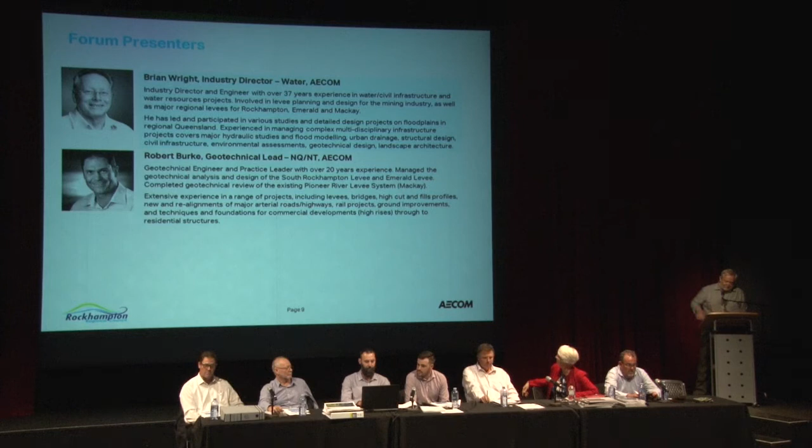The other members of Ben's team are Brian Wright, the Industry Director for Water for AECOM. I've met Brian in lots of places, and he's got the most seniority from the AECOM team, about 37 years experience in water and civil, so extensive experience there. He has led and participated in various studies, particularly in urban areas, design projects on floodplains, right throughout regional Queensland. It's nice to have you here, Brian.

And Robert Burke, he's a geotechnical guy, and he's their lead for Northern Territory and North Queensland for AECOM. Geotech guys are really important when it comes to tying these things into the ground and how the system itself operates if you have a levee. He's certainly AECOM's practice leader, 20 years experience, and he's managed many geotechnical analytics and design for lots of levees around, including the South Rockhampton levee and also the Emerald levee as well.

So that's our panel. They'll be there for your questions as well when question time comes. But firstly, I'd just like to ask Peter to take the microphone and lead us through the project history. Please welcome Peter.

Good afternoon, ladies and gentlemen. It's a privilege to have the opportunity to run through such a comprehensive project and make sure everyone can understand where we're up to and what we think we can achieve by implementing this project. The first part of my presentation is about the history of developing an understanding of the Fitzroy River. It's obviously a massive river, very complex, and it's been studied over many years. I'll also talk about what has been done over the years to reduce flood risks in that catchment and in Rockhampton specifically. The last part is about how we go forward managing flood risks in Rockhampton.

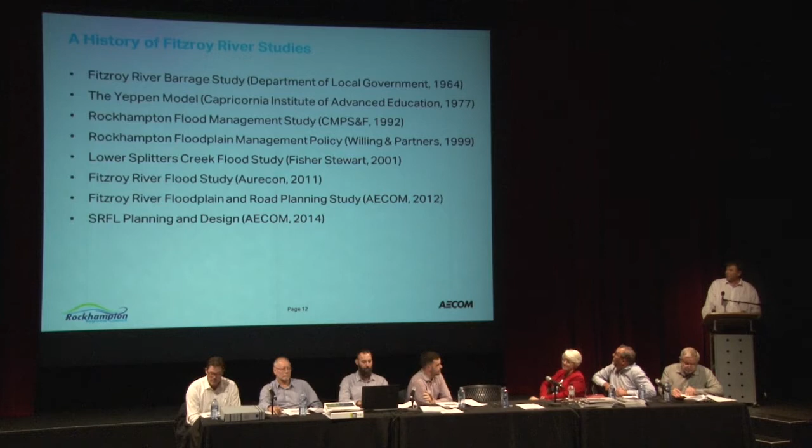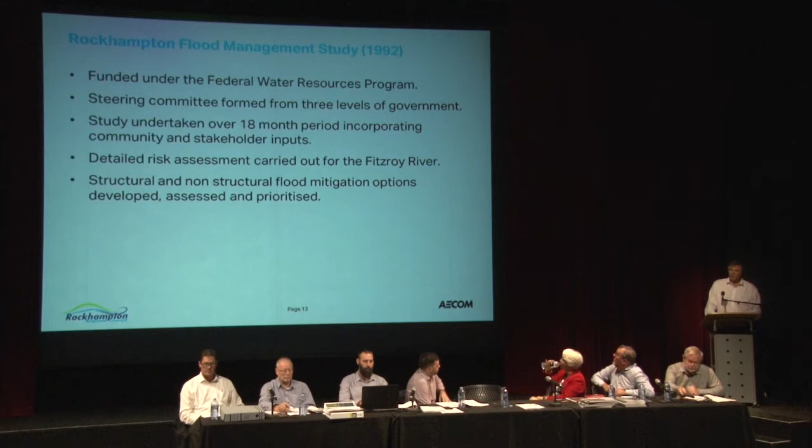In 1992, there was a major flood event in 1991 that prompted this study. It was done by the Water Resources Commission of Queensland, funded by the federal government, and undertaken over 18 months, one of the most major studies ever done on the catchment. It detailed and reviewed all the options to mitigate risk for Rockhampton, including things called structural and non-structural measures, which I'll talk about a little later. It was the most detailed risk assessment that had occurred to date.

What that study identified were some key things. It had two priority areas. The first highest priority was the Yeppen Crossing. The second was the South Rocky Flood Levee. The third was the Airport Levee, and then the Splitters Creek Levee and North Rockhampton. The 1992 study looked at various dams, weirs, diverting floodways, dredging the river, a buyback scheme for affected properties, and also raising the Pink Lily breakout.

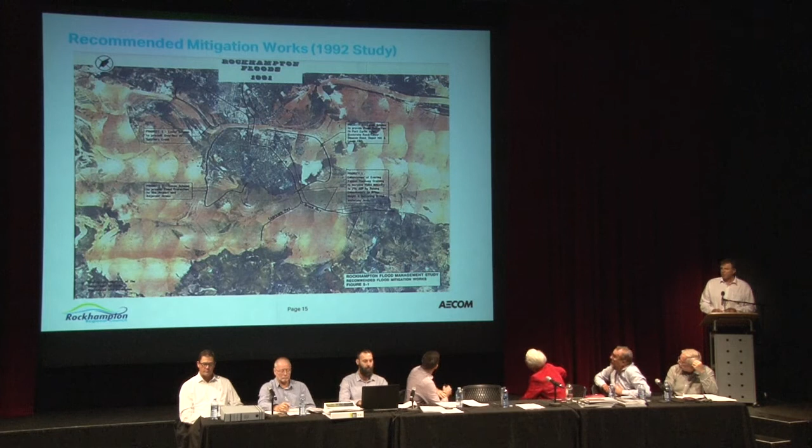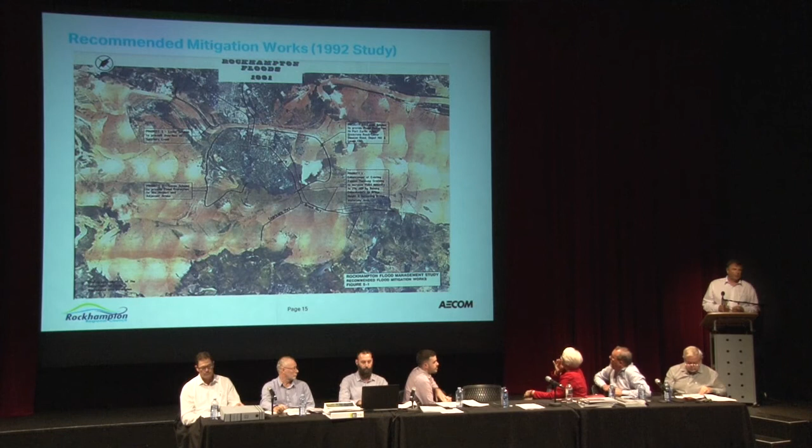So that was 1992, and as you saw on those earlier slides, there have been many other studies since. It got to a point where the council decided to develop its own floodplain management strategy, and that's what this document on the screen is. The strategy, when adopted, set the same priorities: it was still Yeppen Crossing, North Rockhampton was jumped up - and I'll explain why - and the South Rockhampton levee was still at the top. This shows the phases very clearly. We were fortunate enough to have the Yeppen Crossing completed.

There was an opportunity for funding that brought forward the North Rockhampton flood mitigation scheme. As we've said previously, the South Rockhampton flood levee has been fully designed. There was some initial high-level feasibility work done on the airport, Splitters Creek, and there are other ongoing projects across the city that we are studying right now.

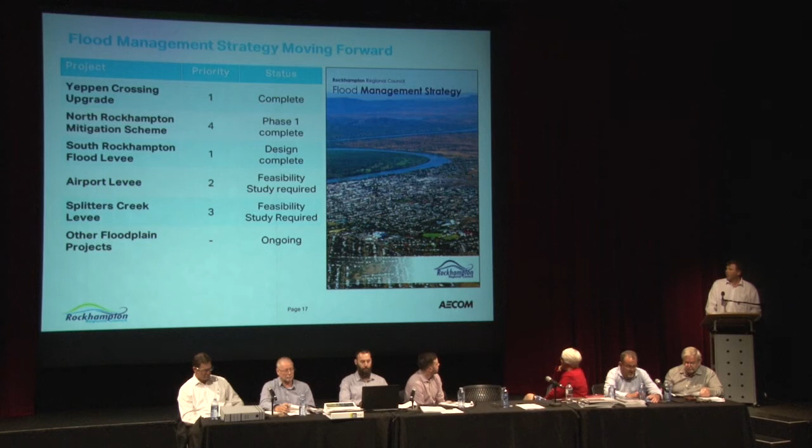Flooding's about not solving it, it's about managing the risk. Right around Australia, communities are built on floodplains, typically beside rivers, because it was a very logical and practical thing to do for a whole range of reasons.

Part of flood mitigation is about minimising and reducing risks. And there's 3 risks that we deal with in flood mitigation. I'll jump to the bottom one. Residual risk is something Rockhampton does very well. That's the risk that you can never remove. It is just not feasible. And the only way to manage that is through disaster management and having a community aware of its flood risk.

and being prepared. The future risk, Rockhampton's done a lot of work in this area. It's about flood policy, it's about planning rules, it's about making sure you don't put any more people within the floodplain and at risk.

The last component is existing risk, and really this is what the South Rockhampton flood levee is about. It's about the existing buildings and the development that's in the floodplain at risk, and the only way to solve it is through a structural measure.

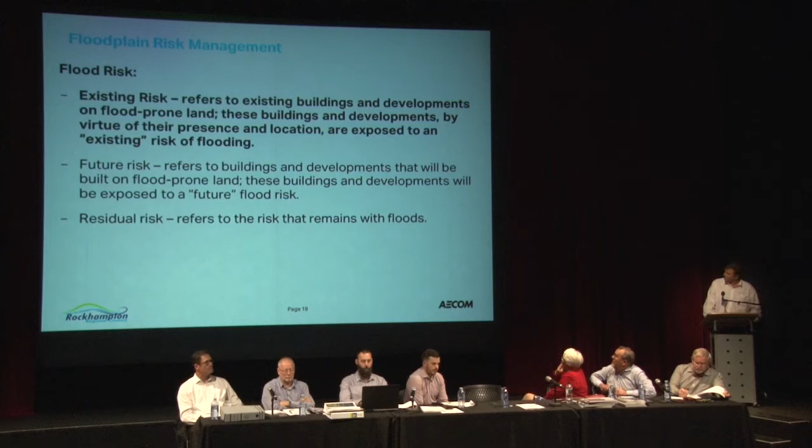And this is just another way of looking at it. So land use planning and flood policy keeps people away from the water. Structural, which is like the levee, is keeping water away from the people. Those other areas which I talked about before, which is development and planning, which is reducing risks for people who live in homes. It's about setting floor levels and giving freeboard. It's about keeping them away from those high velocity areas. And the last, as I said, is about disaster management.

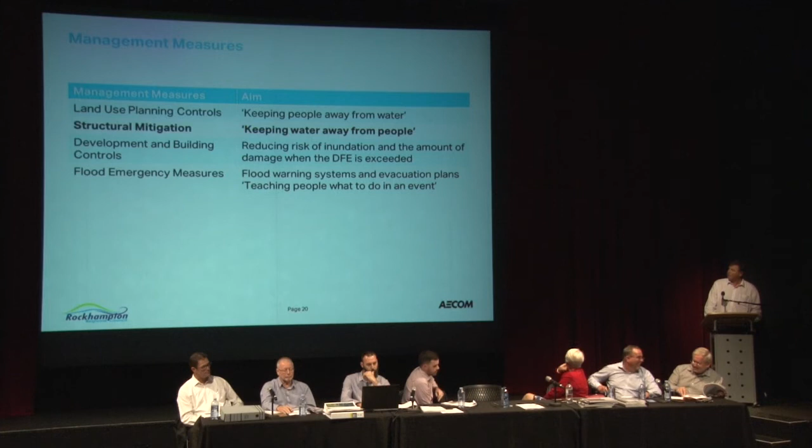Okay. So where are we at the moment?

Council made a commitment in 2013 to investigate the levees. It set money aside in its budget. It sought funding from federal and state government and was successful in achieving that. 1.45 million has been spent on the feasibility and design of the South Rockhampton levee. 416,000 has been provided by each state and federal. The study was completed in 21 months.

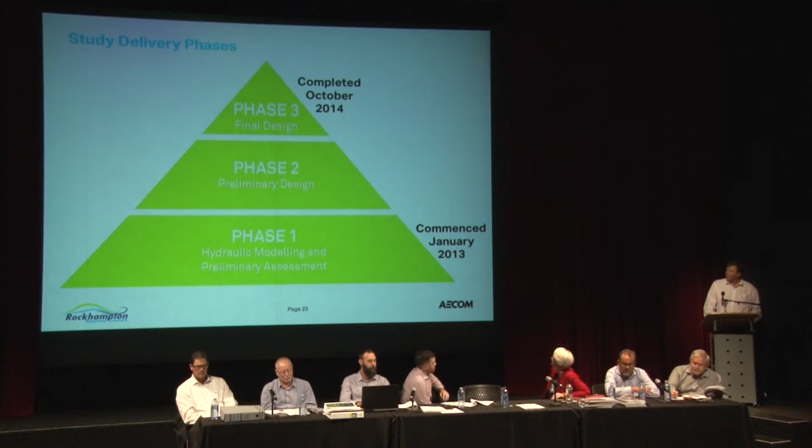And here shows the phases. So the initial phase is about modelling, and it's effectively understanding the flows, the depths, and how the floodplain behaves. It looks at the options, and you'll see some more of that in the presentation. Phase 2 was preliminary design, and in October 2014, the final design was prepared. That included detailed drawings of the proposal, the alignment, and also had prepared estimates and had done a review of environmental considerations.

So these are just a snapshot of the investigations that were undertaken as part of that project. Right at the top you'll see drainage and hydraulics, the most fundamental. That's what we need to understand before we can move forward. Then we talk about environmental heritage, geotechnical analysis, civil design, visual amenity, the impact on services, transport, and ultimately then a cost estimate and economic evaluation.

Back then, the project objectives were to develop a levee system which will protect low-lying areas of Rockhampton occupied by homes, businesses, schools, parks and infrastructure from major flood events. Not all events, but major flood events to a certain level.

Improve the flood immunity of the Bruce Highway, the Lower Dawson, Gladstone Road, which back then was still also looking for that construction of the Yeppen Crossing.

The other objective was to minimise adverse impacts of the levee, visual, amenity, hydraulics, environmental impacts on our existing infrastructure and minimise resumptions for that corridor.

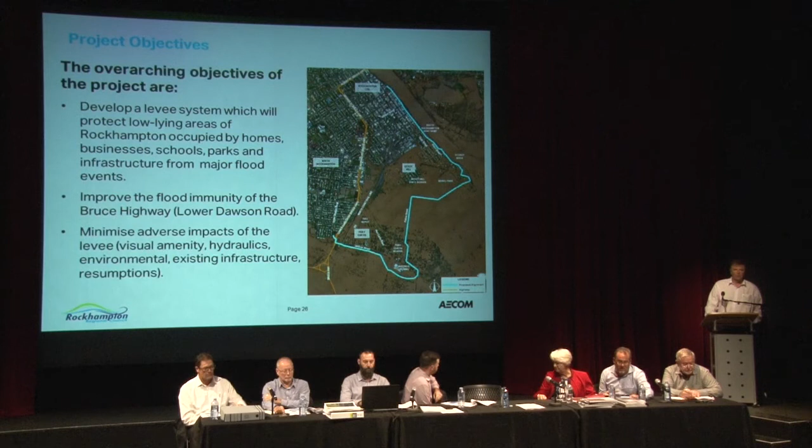I'm now going to hand over to Ben, who's going to run through the technical presentation that's been undertaken by AECOM. Thank you.

Thanks, Peter. Well, firstly, I'd like to thank everyone for coming along tonight. It's not very often we get a big crowd like this in front of engineers to explain what we've been doing for the last few years, but really appreciate everyone's time to come along and listen to us. We've already had the introductions, but I'm joined by Brian and Rob, so we'll both do a bit of handing over just to cover the technical aspects of the project.

So I might just start with our role. A lot of people ask who AECOM are. We've operated an office here in Rockhampton for about 17 years. We have 30 local staff, but we're a much bigger beast than that globally. You can see the graphic there - we're in a lot of countries, we have a lot of staff, and we do this kind of work fairly regularly with flood mitigation projects.

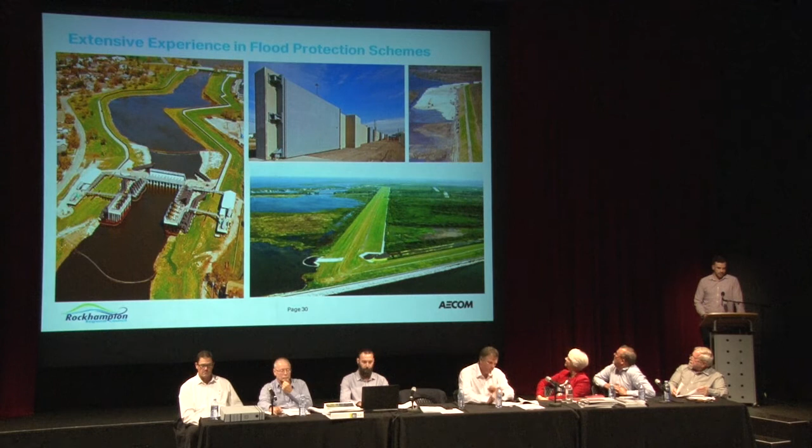So that's just a few examples. This is some work we've been doing, international projects, but also some locally as well. The one on the left is actually a major flood pumping station and floodgate. There's a big swing gate up in the top there, and then we've got some earth levees as well, so it just gives a snapshot.

In terms of our role, we were engaged by council, and ultimately we were there to assess the technical feasibility of the South Rocky Flood Levee project. Our role is to provide independent advice and technical analysis. We're not here to say whether the levee should proceed or not. We're here to give all the information for ultimately you to make that decision.

There's a lot of guidelines and technical standards that surround levees. Levees are major infrastructure projects, and so we have to align to those as engineers. We've also obtained inputs from a range of stakeholders throughout the design process, and overall there's 3 of us here, but we're going to be talking for about 100 technical specialists from AECOM who have been involved on this project, both in Australia and the US.

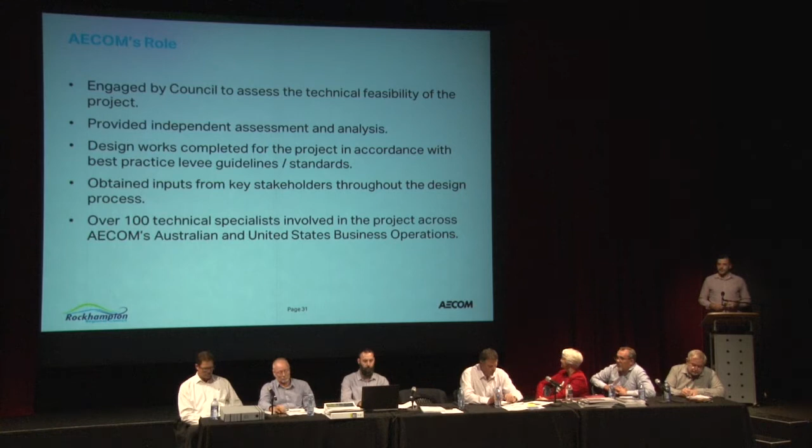I'll just quickly step through a few key definitions, because we will talk about this throughout tonight and probably in the Q&A as well. Levee - I've got a little definition there, but I will have a slide shortly just to explain that. Most people, I'm pretty sure, are aware of what a levee is.

We will talk about average annual damage, and that's the long-term annual cost to the community and the economy due to flood damage. When we do economic evaluations of levees, that's something we look at - what was the damage before annually and what is it afterwards, so we can see how that levee performs.

Afflux is another key term that's used fairly regularly. Some will be aware of that, but afflux is basically where we put an obstruction in a flow path. We have an increase in water level upstream of that obstruction, normally a decrease in flood levels downstream. So when we're talking about afflux, that's what we're referring to.

Benefit cost ratio is another one which will also be discussed tonight. Basically that's a ratio between economic benefits of a project and costs. So when the BCR is above 1, that's normally an indication that it's worth considering for funding and implementation.

Lastly, and probably the key one which I'll cover, is annual exceedance probability. When we come to do risk assessments and flood studies of major river systems, as engineers we always talk about annual exceedance probability. That's the chance that you would have a flood equal to or greater than that in a given year. Some people would have heard the Q100 or the 100-year ARI flood.

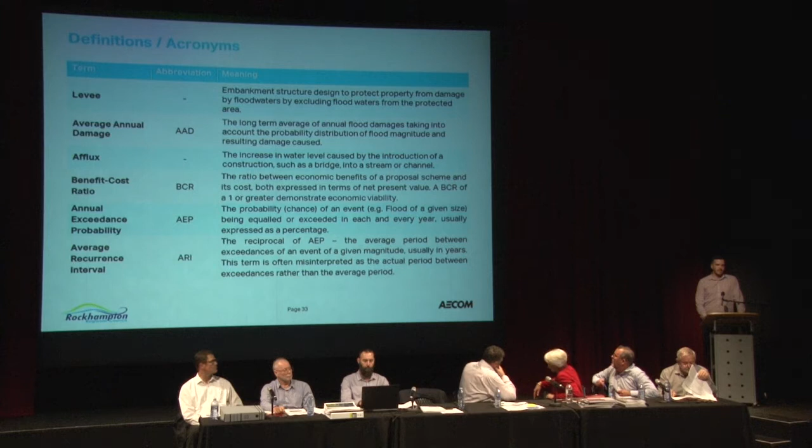That's used fairly regularly, but we won't be saying that tonight. It's a terminology that can be misunderstood by the community, and some people think if you've had a 1 in 100-year flood, you won't have that for another 100 years. That's just not the case. Statistically, what we'd prefer to say is you've got a 1% chance of that happening each year.

Emerald's a good example. Emerald had a major flood in 2008, which was a 1 in 70 year flood, and then 2 years later had a 1 in 130 year flood. So they've had 2 major floods within 2 years of each other. Statistically, that's just how it goes.

In terms of levees as a flood mitigation option, as Peter mentioned, there's a range of different options, and levees aren't always the answer. Levees are used in particular circumstances where it warrants them. But if a levee is a potential option, what we're normally looking at is raised predominantly earth embankments. However, there are other types of levees which I'll go through as well.

In terms of how they get used around the world, there's about 48,000 kilometres in the US that the US Army Corps knows about. They expect there's another 150,000 kilometres that they don't have documented, across almost 12,000 different systems. So the statistics are pretty mind-boggling. You've got 2/3 of the US population behind a levee over there, so it's frequently used. There's several 100,000 kilometres when you sum that up with the US and Europe, and even in Australia we've got several thousand kilometres used. So they are used around the place.

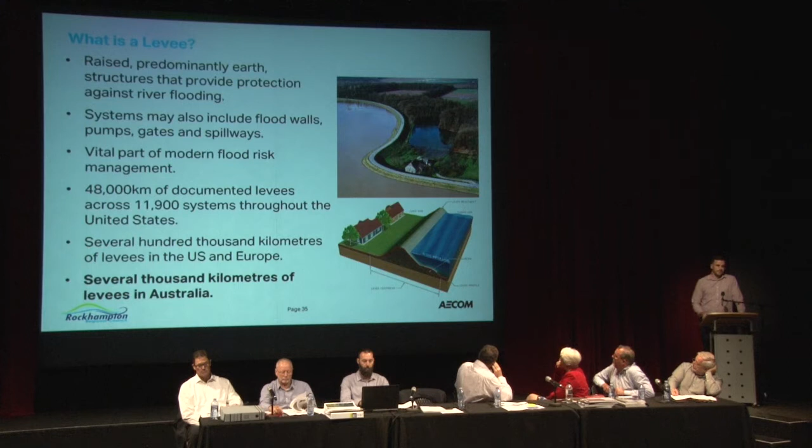So just some examples. I thought it's worthwhile doing a quick snapshot. These aren't all the levees, but these are some key ones.

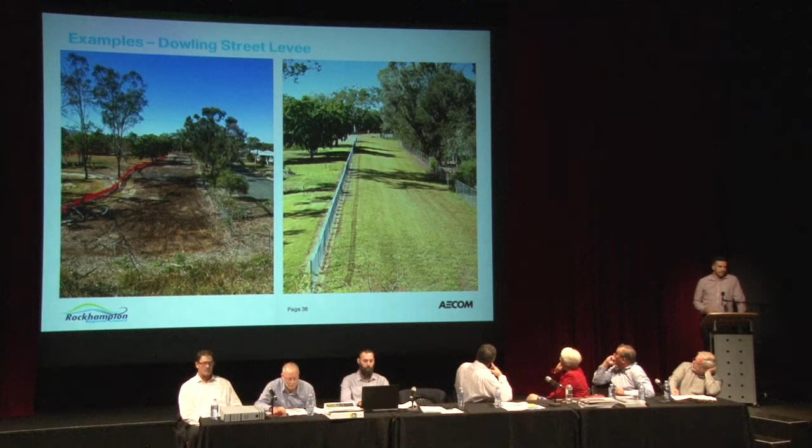This is in Rocky, in our backyard. This is the Dowling Street Levee, Kershaw Gardens, for those familiar with that area. It's an 800 metre long crib wall system, put in place in 2016, protecting about 20 homes. You can see on the left, before construction, on the right, after construction. And this was it during the flood we've just had - it's a bit hard to see, but that's the levee running around here.

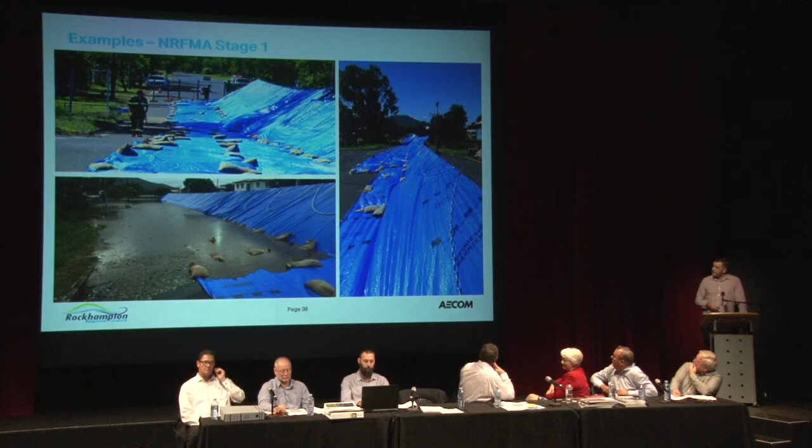For those not aware, Lakes Creek Road is actually a high point all the way along, and that system in itself performed as a levee. So the road and rail there are higher than the flood height, all the way up to a 1% annual exceedance probability - quite a high level of flood protection offered by Lakes Creek Road.

So there's about 400 properties protected with this stage 1 of the scheme. Stage 2 is to ultimately move that barrier further down and protect more properties, down to Water Street. But Water Street requires reconstruction in order to achieve that, so that's a future stage of the scheme.

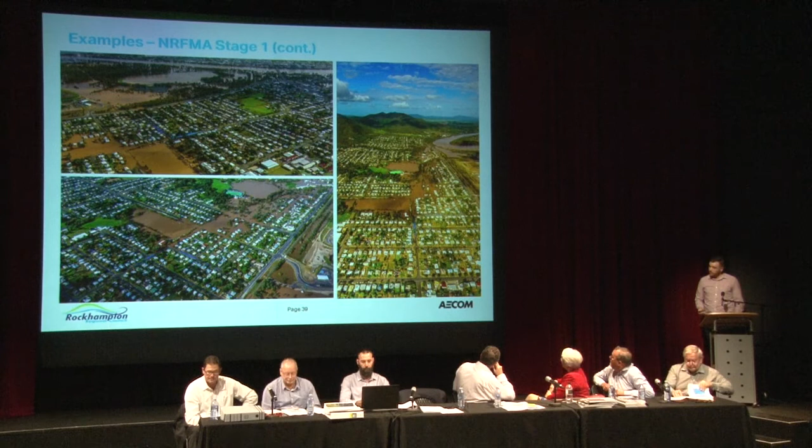And all the neighbours up in Mackay - Mackay's had a flood levee system since the 1970s on the Pioneer River. It's a mixed type system, with earth levees, vertical flood walls, and crib walls, very similar actually to the South Rocky flood levee proposed here. Longer than ours, 13 kilometres, across 7 different levee systems on both sides of the Pioneer River. That system's been in since the 1970s and has protected Mackay on numerous occasions - 2008, 2010, and even in some of the recent flooding we've had this year.

Charleville, most people are probably aware of this one as well. Completed in 2009, upgraded slightly in 2013, it's protected against 3 flood events since construction. Again, it's a combination - earth levee components, gate crossings across the road like we'll have here, some temporary barrier as well, and some vertical walls. That's another example of a flood levee system used in rural Queensland, costing $20 million.

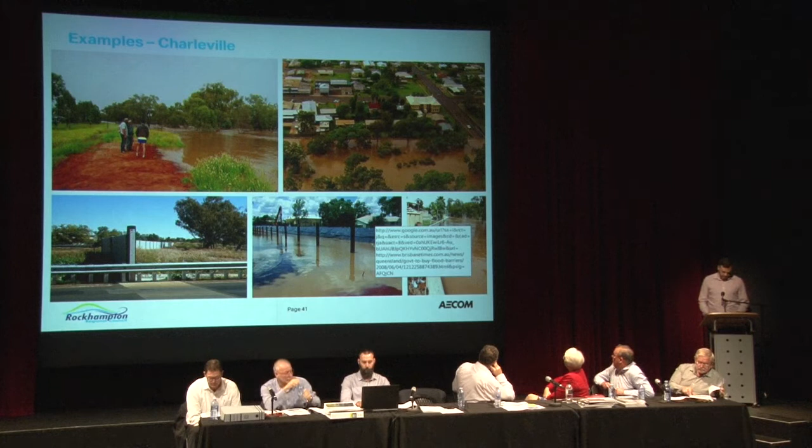And after that one, Suncorp have done some assessments - average insurance premiums went from $990 a year down to $400 after the levee was completed. And it's actually paid for itself already, after about 8 years.

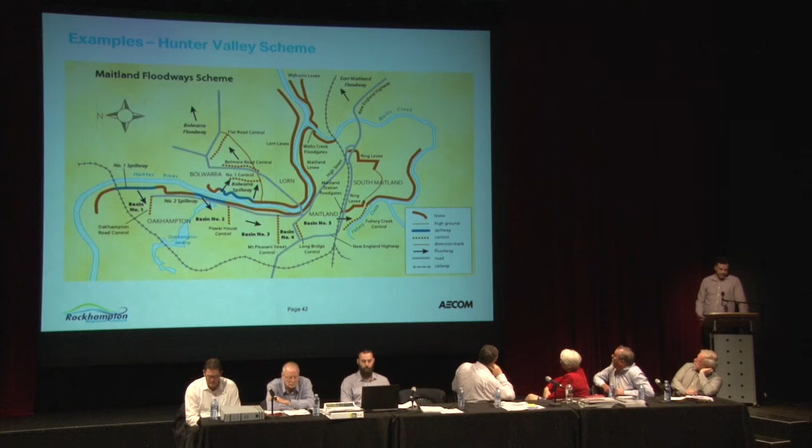So you can go to the Hunter Valley. The Hunter Valley scheme is enormous, with 160 kilometres of flood levee, 5 basins, and 3 spillway overflow points. The flooding that occurred in 1955 really spurred the council, the state government, and the feds to implement this scheme. It's mind-boggling, 160 kilometres of levee, and it's protected a number of townships there in 1971, 1977, and 2007. So it's been there for a long time.

Launceston, down in Tasmania, is another good example of a scheme that was completed earlier, quite some time ago, and was starting to become structurally deficient due to old standards and codes and ongoing issues with not maintaining some components. So they've got in there and actually reconstructed the scheme. It's a 12-kilometre levee system completed in 2015, only recently, a $60 million project which protected during the 2016 event, which was quite a significant flood event down there.

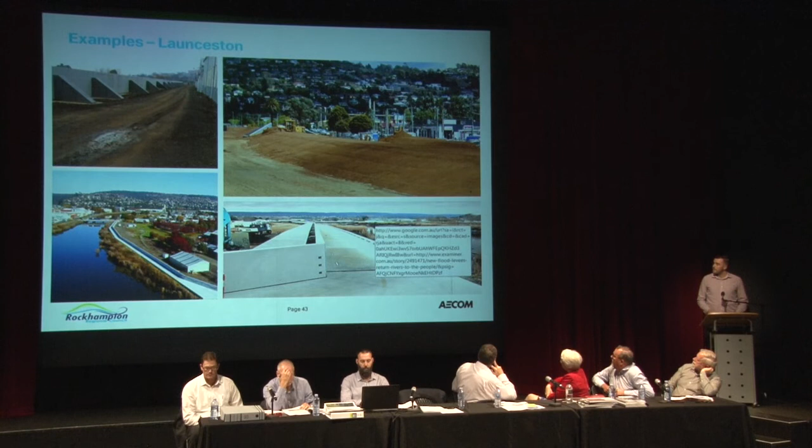I'll get in front of everyone who's going to ask about Lismore. We'll put the record straight, because the media did a pretty poor job, to be honest, explaining what happened in Lismore. The Lismore flood levee system was completed in 2005, and it protected the CBD of Lismore in 2005, 2007, and 2009. The cost of those 3 events alone has already paid for the levee system, plus almost again. It's a 3 kilometre long levee system, and it cost $20 million.

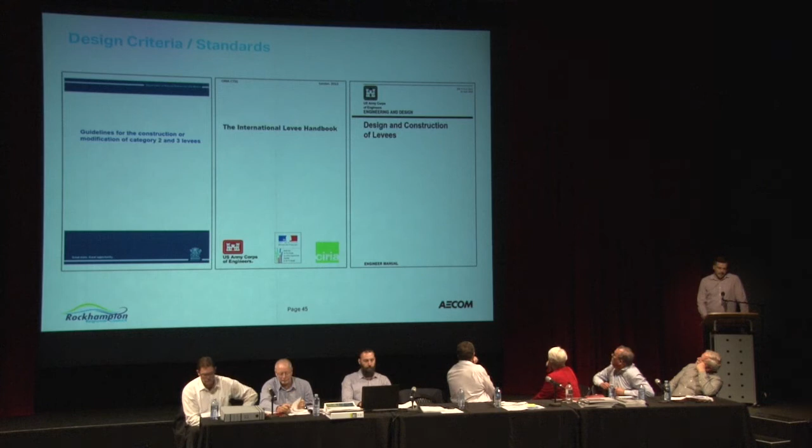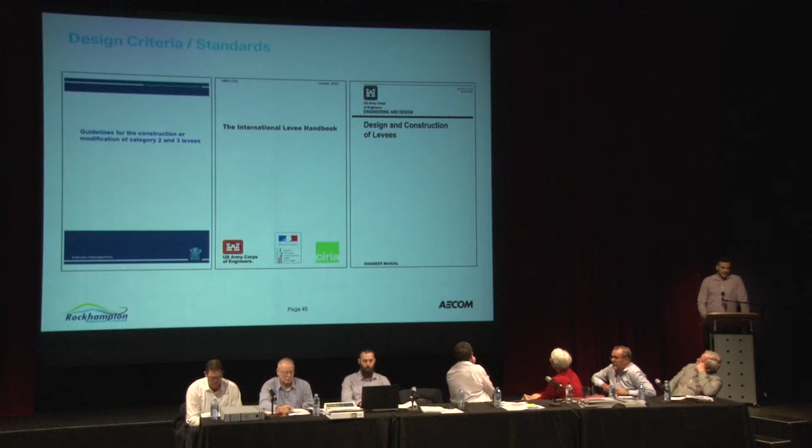In terms of design criteria and standards, there's a number of relevant design guidelines and standards. The one on the far left is really good news for the engineering industry - the Queensland State Government is now regulating levee banks and has been for a couple of years now. It was much needed to make sure levees are designed to the right codes and requirements. There's now a requirement for a council, as in this case, to make application under the new levee regulations, with specific guidelines and requirements levees must meet to achieve approval.

The Queensland Levee Guidelines make significant reference to the International Levee Handbook. That's been the work over 5 or 6 years from the international levee community across multiple governments to pull together international best practice when it comes to levees into one big guideline. That's the particular guideline that's been adopted for the South Rocky Flood Levee planning and design.

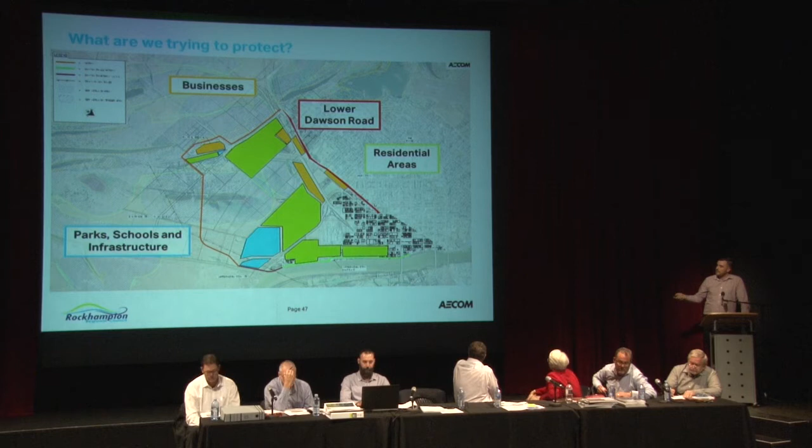This was the original alignment put forward in 1992, which Peter showed a bit of a map out of the study back then, and that's where we started with the study. First, as we worked through this, there's a number of things that probably pop up for most people - it did encompass the key infrastructure, the residential area, and commercial buildings.

This is a key flow path, and I'll go through this a bit more, but this is the roundabout, and this is going out through the Yeppen crossing and coming into town. The flow through this throat here, through Yeppen North as we call it, is significant, and it's a very important flow path for the western floodplain.

The implications of the levee here cause the majority of the effects back upstream through the western floodplain and back to the airport. So the choice of alignment needs to be made very carefully. That was a key issue with the old '92 alignment, it jutted out a bit, and that wasn't going to be good from a hydraulics perspective.

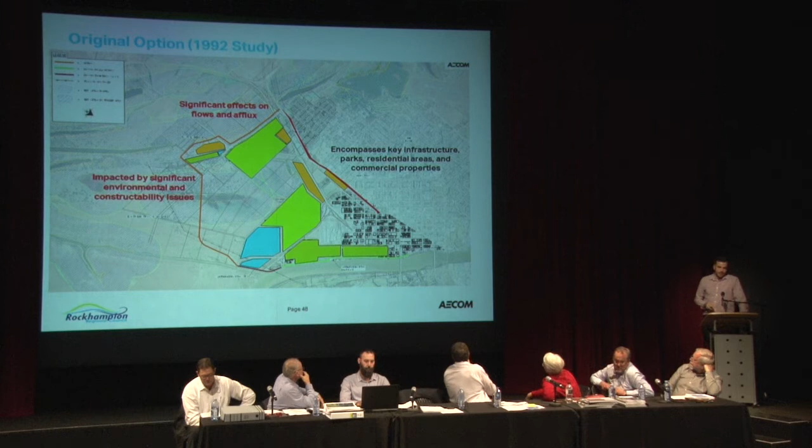At the time it was probably unknown, but now we know it crossed right through the middle of a wetland, and not just any wetland - one of national significance. It's a key wetland for the region, and it also has significant cultural heritage value to the Darumbal people. That was a key issue with the original 1992 alignment crossing through there.

We also had some interference with some fairly major overhead transmission lines coming into Rockhampton that Powerlink own.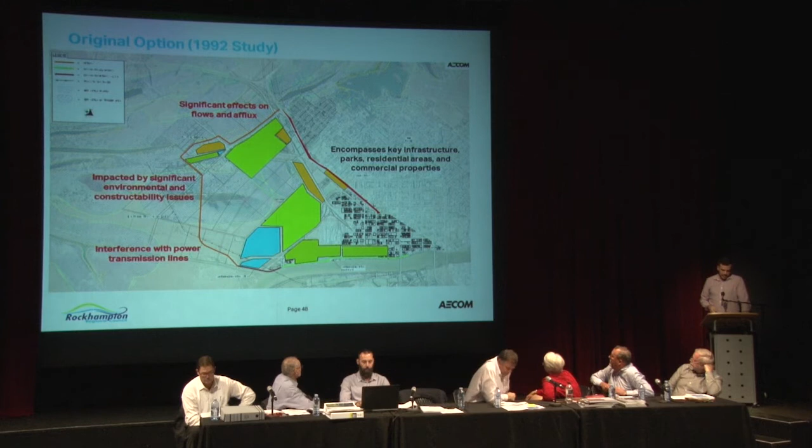So the study commenced with us looking at alignment options, and we generated a number of options which you can see there, with different pros and cons as always with this kind of infrastructure, some people being left out, some left in, and obviously different costs associated with those different levee alignments.

The process then becomes a fairly rigorous one over about 5 or 6 months. We looked at a number of different disciplines across our technical teams to determine the pros and cons of each alignment, then ran through a process of scoring and workshopping.

We had a number of workshops with key stakeholders, including state government input through a number of those, basically trying to arrive at the best balance with the selected levee alignment. It's always a balancing act with any of this kind of infrastructure.

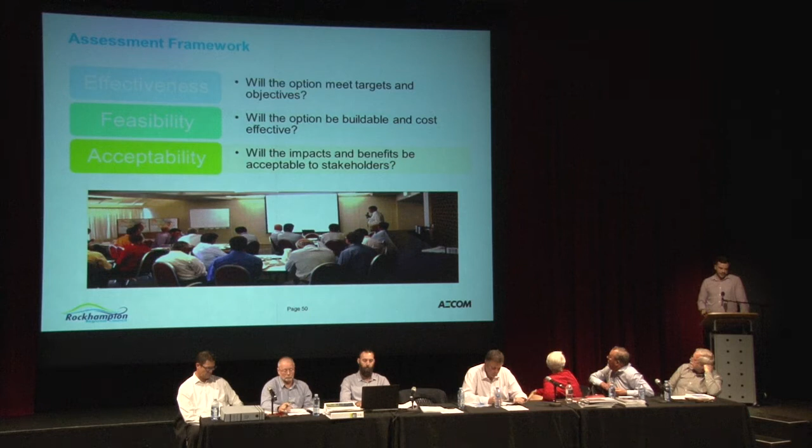We've moved well away from that wetland and onto the Fiddes Street area. Similarly, we've pushed right over to Rosehill Park and got around the back of the treatment plant before coming down the main strip down Quay Street.

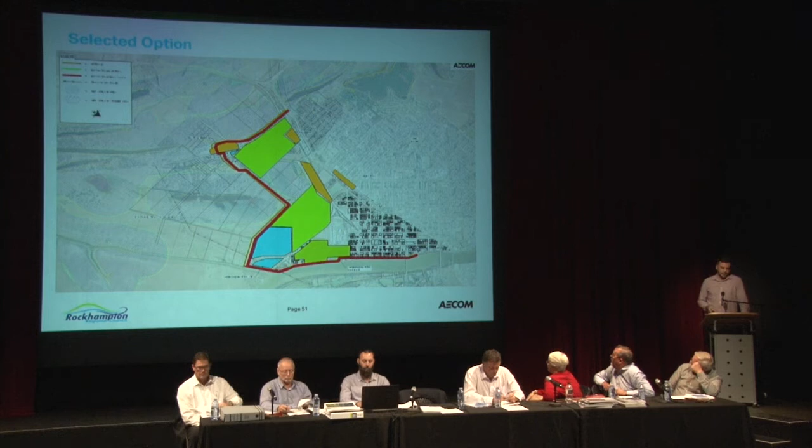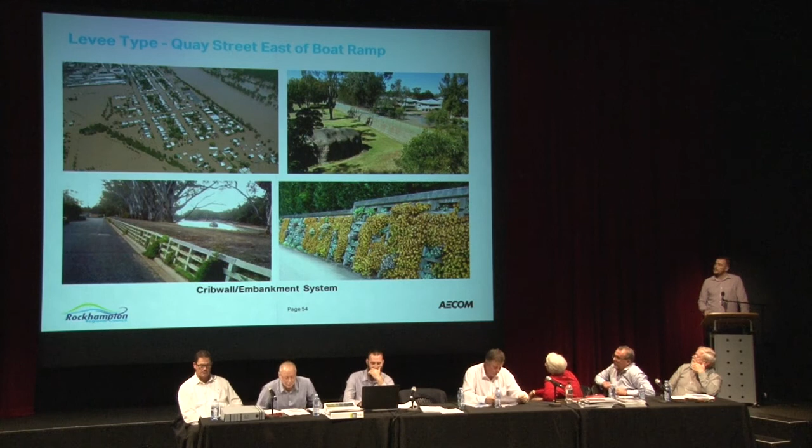When we get into the rural areas where we've got more space, we adopt the earth levee. It's fairly stock standard - we'll talk more detail around the specifics and material properties, but we go with an earth levee, and in this case we're adopting a vinyl sheet pile on top. The intent of the vinyl sheet pile is purely just to provide the freeboard, which I'll touch on shortly. But for the most part it's the earth embankment, grassed, and in some locations rock protected where we need to from velocities.

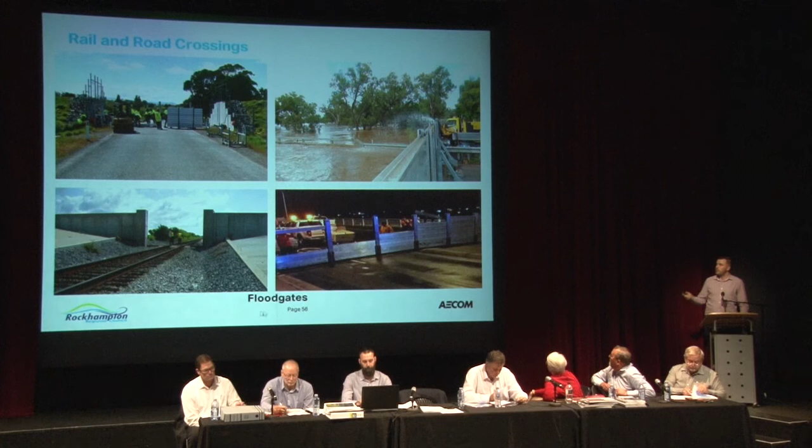We have a number of gates where we're crossing existing roads, and we also cross the North Coast rail line, which requires a gate structure. Gates across roads and rails are done all the time in levee systems, nothing new. You can see examples from Australia, Europe and the US—they're done fairly frequently. It's about bringing the levee to terminate on either side of the road or rail, then putting demountable barrier in before the flood event arrives to close that opening. In normal situations, the levee terminates on either side of the road and rail and continues onwards.

The obvious intent of the pump station is to collect stormwater. If we have a river flood occurring at the same time, we're collecting stormwater from local runoff and rainfall and pumping that over the levee. It's a frequently used bit of infrastructure for most levees.

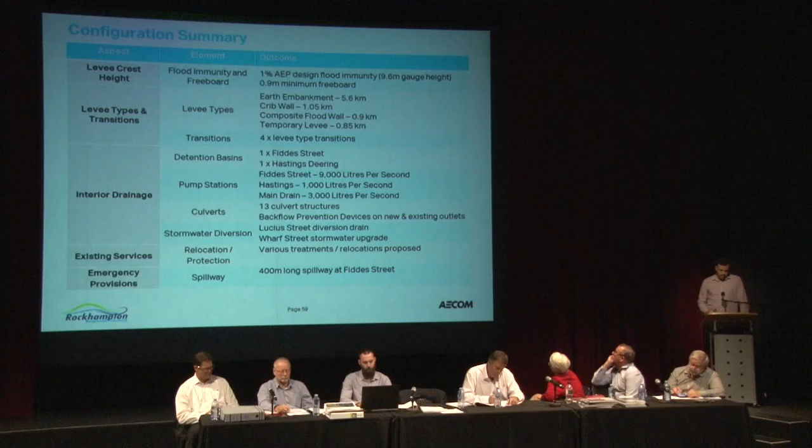That incorporates a 0.9 metre freeboard, which is quite significant, probably one of the largest that any Queensland levee has got on it at the moment, and we'll explain why.

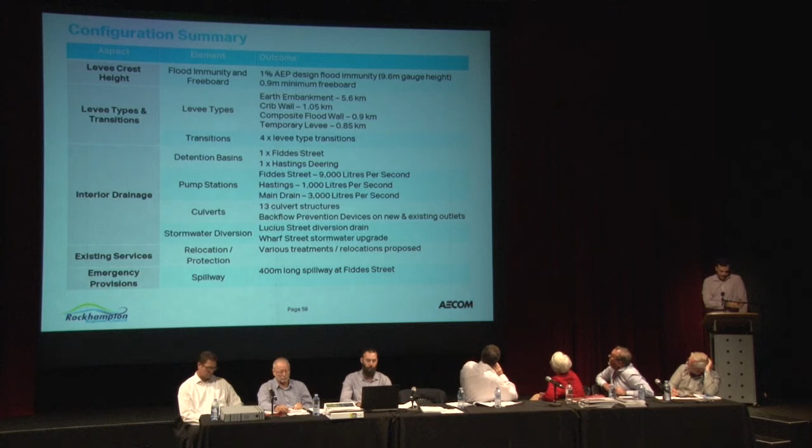Working through, we then have a number of levee types, so you can see the breakdown of the levee types we just discussed. Ultimately, earth levee is used predominantly, 5.6 kilometres. It's the cheapest, it's the most effective, and we use that wherever we can. We do have transitions between levee types, and that's really important - it's a key consideration from a technical perspective about how you transition from one levee type to the other. In history, they can be weak points, so there's a lot of guidance around design of those transitions.

In terms of interior drainage management, we have 2 detention basins, one at Fiddes Street, one at Hastings, and 3 pump stations. To put that in perspective, think of a 1 litre milk container - we're talking 9,000 of those a second at Fiddes Street, 1,000 at Hastings, and then 3,000 litres a second at the main drain.

Culverts allow flow through, so where the river isn't up and we just have a local storm event, we want that runoff to get through the levee system. We have 13 culverts that allow flow through the levee in normal operation, and each of those have backflow prevention to prevent the river from backing up through those culverts.

We do have some complementary or associated works for Lucius Street and Wharf Street, both stormwater drainage upgrades to facilitate interior drainage behind the levee and get that water to the main drain to then be pumped out.

There's obviously a number of existing services, which I won't go through in detail now, but there's a number of protection and treatment requirements for those services like power, gas, and electrical.

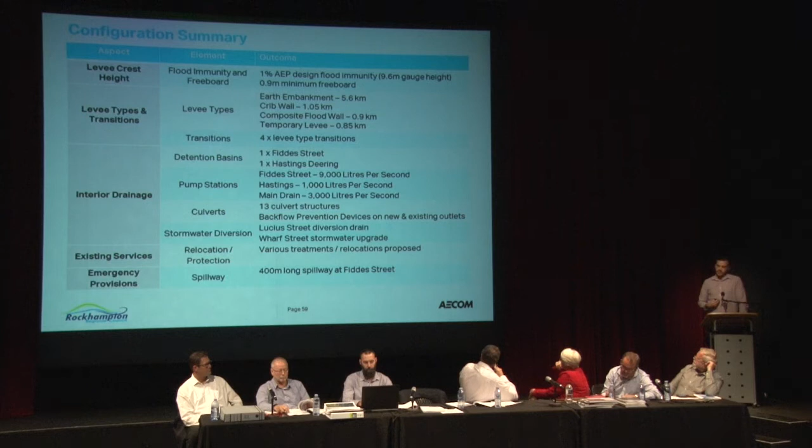And then we have our emergency spillway - it's a 400 metre long spillway at Fiddes Street. We'll talk in a bit more detail about that.

So that's me for now. I'll hand over to Rob and I'll let him cover the geotech considerations.

Good evening, everybody. I'm going to give a relatively brief overview of the geotech conditions, especially after that first start.

As you can see here, the ground conditions along the alignment are alluvial - flood-borne deposits, usually comprising sands and clays. This is borne out by the findings of the investigations undertaken. So between lower Dawson Road and Fiddes Street, what's been identified to date is a thin stratum of surface clay underlain by clayey and gravelly sands.

Generally that alignment, based on the embankment arrangements, is definitely suitable for carrying the loads of the embankment, with expected moderate seepage to occur primarily beneath the clay capping.

Whereas for Fiddes Street to Fitzroy Bridge, there's a thicker, up to 6 metre stiff clay underlain by clayey and silty sands, also suitable to accommodate the levee structure, but because of the thicker clay deposits, there's less seepage potential.

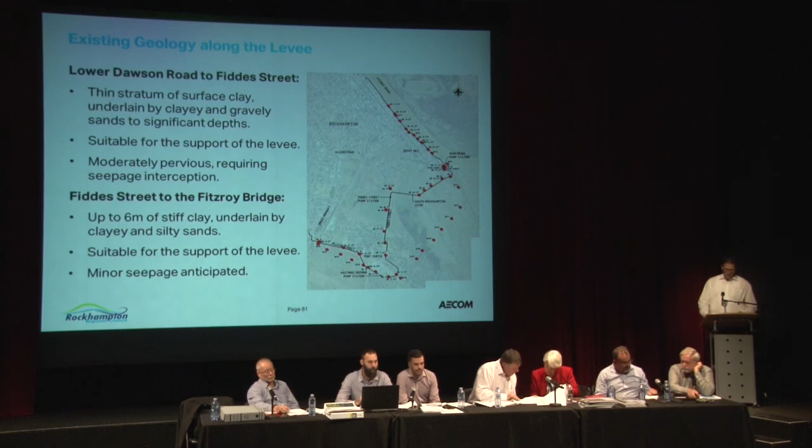I'll just flip on to what some of the ground investigations were undertaken. There are 3 ground investigations that have been undertaken.

The council were extremely proactive in undertaking the first investigation before the commencement of the design, which followed the alignment of the original, first option alignment. That was very helpful in determining additional works and investigations staged thereafter, which comprised geophysics and then borehole probes, test pits and cone penetrometer testing.

To supplement that, in situ testing to determine expected permeability - i.e. the rate groundwater seepage is going to travel through the soil - was undertaken in the field to give us a more accurate representation of the ground models.

As part of those investigations, we were asked to evaluate material sources. Embankments are built from soil, and finding a source that would meet the expected 400,000 cubic metres of soil required to build the levee was needed, so the Gracemere site was looked at after reviewing some other alternatives. The Gracemere site was found to provide suitable material for our embankments, comprising a core centre with more permeable material on the outer flanks. Some treatment would be required, but the proximity and location seemed to provide value to the project.

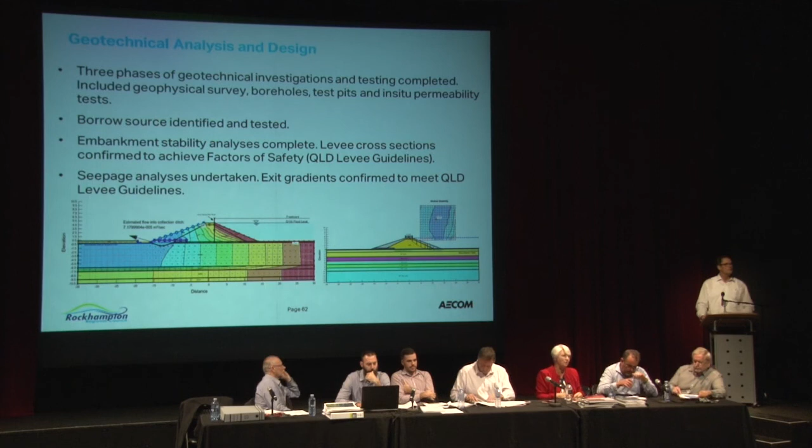So basically, after assessing the seepage potential and the flow paths, that's what goes into determining pumps, how to collect the water, and how the hydraulics is managed.

Stability is another aspect of the embankment, to ensure that during what's called a rapid drawdown state, which is usually the most critical state for a soil embankment, when it's saturated and water's up against the wet side of the levee at its maximum height, it actually provides a stabilising force. What occurs is when the flood level drops away, the embankment's fully saturated, and then it becomes more likely to be susceptible to instability.

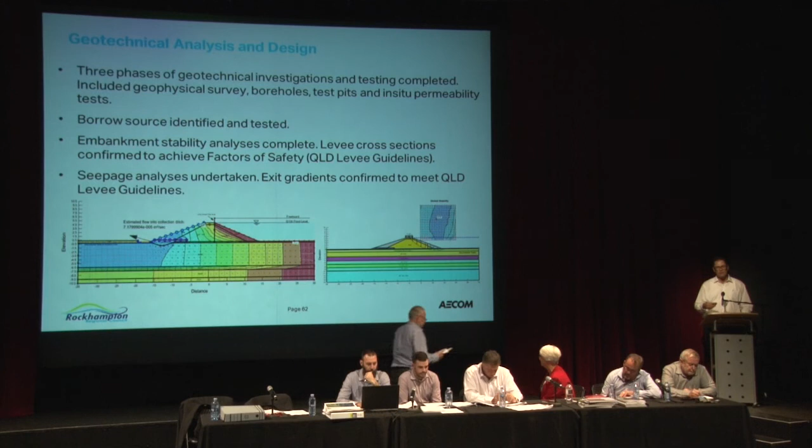The stability analysis ensures the long-term performance and behaviour of the embankment, and is also carried out to confirm compliance with specifications. All that information feeds into the other design teams that evaluate the hydraulics and the requirement for pumps. So I'll pass over to my colleague Brian to discuss the other civil structures associated with the project.

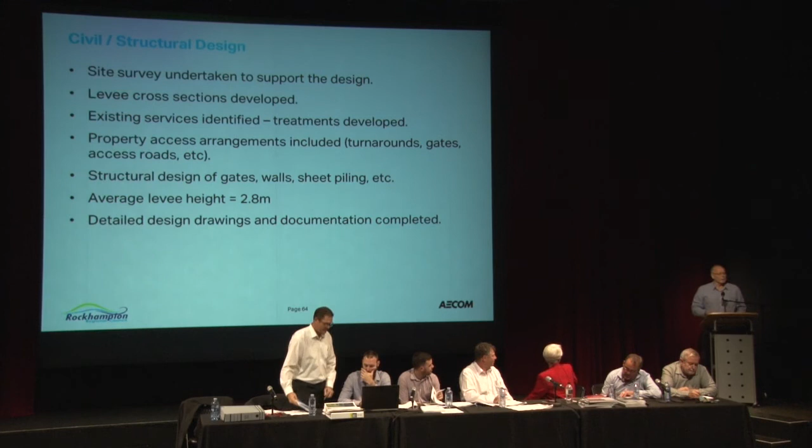In terms of the civil and structural design, as Rob mentioned, we gather a whole lot of information from the geotech side, from the hydrology and the hydraulics, and we develop the engineered components of the levee system.

There was LiDAR data originally, and then a specific site survey along the route was undertaken. We developed our type cross sections, and as Ben mentioned before, there's basically three types: an earth levee, a crib wall, and vertical levees or vertical walls.

We looked at property access arrangements, including turnaround areas, some gates, access roads, etc. We then did the structural design of the gates, which is basically either concrete or steel structural designs.

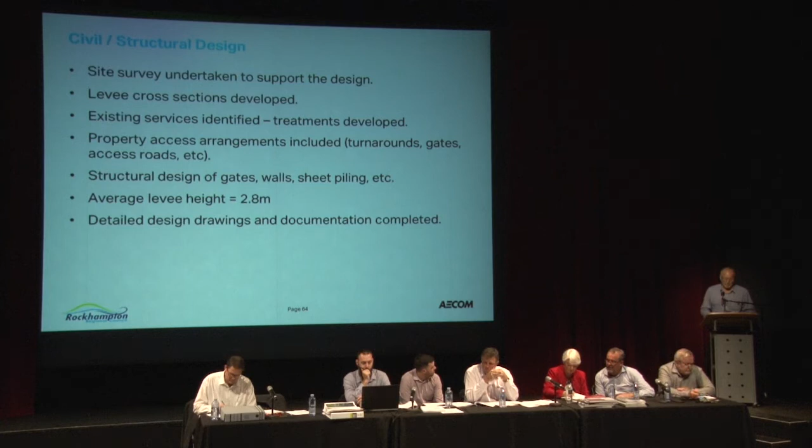Just as an indication, the average height of the levee is about 2.8 metres, but it does vary from about 0.3 up to about 5.8 metres high. At the end of all that, we ended up producing detailed design drawings and the documentation that goes with that.

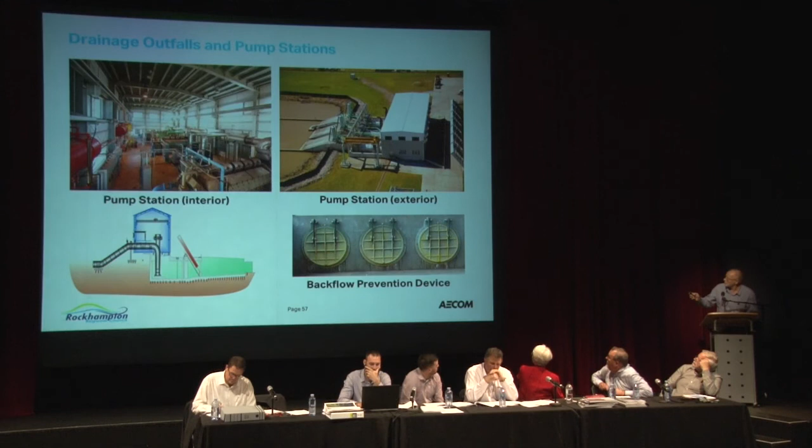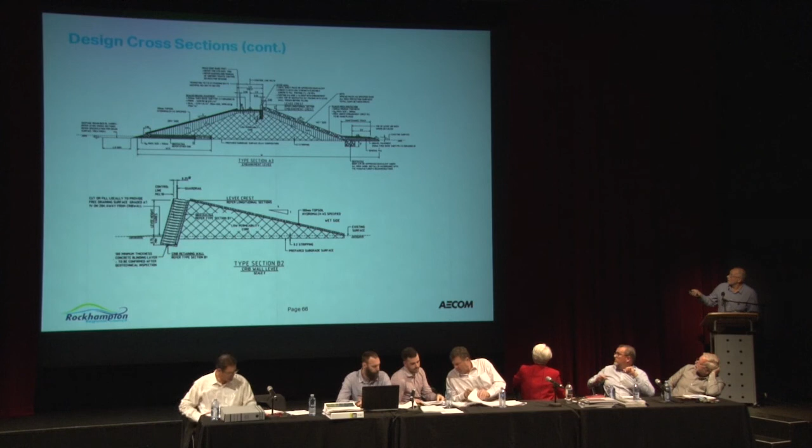In this top one there is some rock protection on some areas of the outer embankment where flood velocities are higher, which needs to protect the levee. And then this is the composite levee down here - sorry, that wasn't the composite, that was the crib wall.

I just want to mention also about visual amenity very quickly - it's a very high-level study assessment looking at greening areas. I'm getting a nod to say we've got to keep moving quickly, so there's some further work to be done in terms of that visual amenity.

And I'll hand back over to Ben quickly.

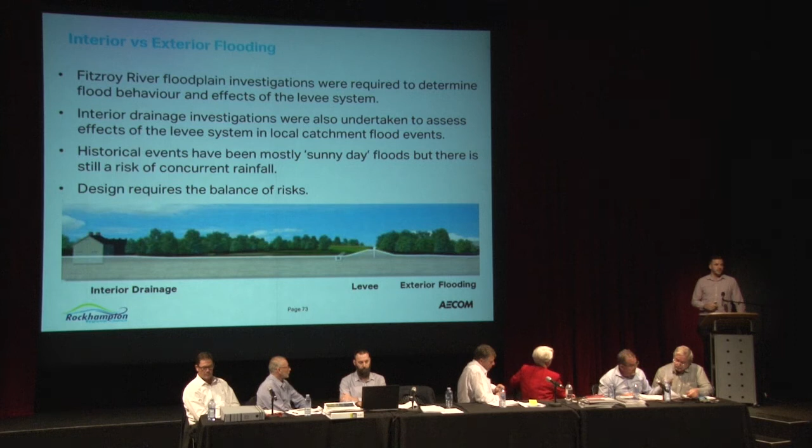Firstly, interior versus exterior flooding. There's two separate issues here with levees, and the bottom hopefully shows that. So when we have exterior flooding, we're talking the Fitzroy River. When we're talking interior, we're talking the South Rockhampton local catchment, which can flood as well behind the levee.

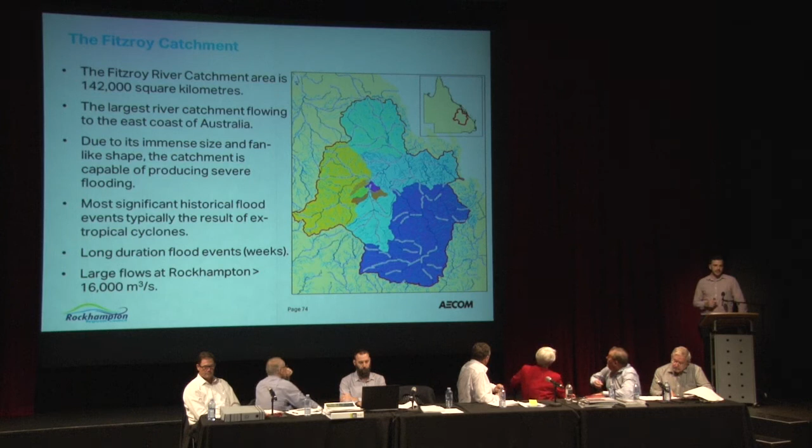I won't go through this - most are aware, Fitzroy River catchment, 142,000 square kilometres, biggest catchment to the east coast of Australia, and large flows - that's probably the only other thing. So 16,000 cumecs or greater.

In terms of the flood behaviour, when we get flows greater than about 7,500 cubic metres a second down the river, we get the western breakout that occurs, which I'm sure all of you are aware of.

So how do we look at a catchment the size of the Fitzroy? In this case, we're fairly lucky - we've got over 100 years of gauge data upstream of Rocky at Yaamba, Wattlebank and the Gap, and so we combine those records and we can look at flood peaks and volumes.

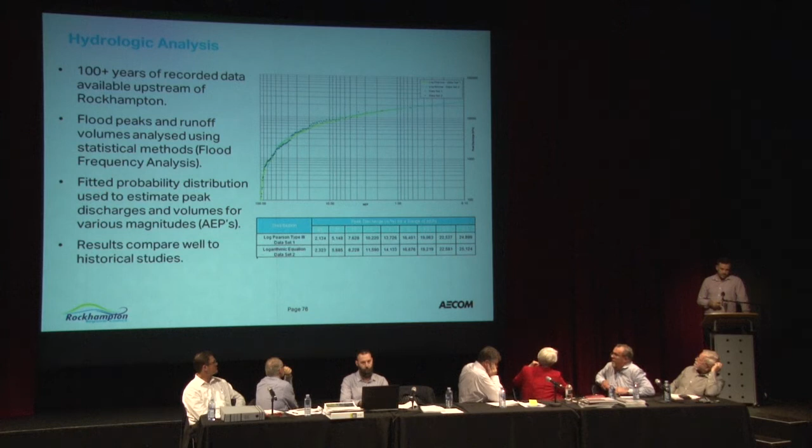Every flood's different, everyone's aware of that, but we can do statistical analysis of all those records to work out a best fit probability distribution, which you can see on the right, and that allows us to estimate flood frequency quantiles, which are flows basically for different probability events.

Then we turn to the hydraulics, so we have an indication of how much flow is coming down the river for different annual exceedance probabilities, and then the hydraulic model turns those flows into flood behaviour - what height, what extent, what level, what velocity would that water get to around the floodplain. In this case, it's a two-dimensional flow model developed for the river.

To cut off those questions before you ask - no, this model isn't used for flood forecasting. So if the flood forecasting in the last event was a little bit out, that's not this model. That's a model that BOM runs, which takes a couple of hours if that. This model here runs for about 3 to 4 days, so it's a much more detailed model that's required for the floodplain.

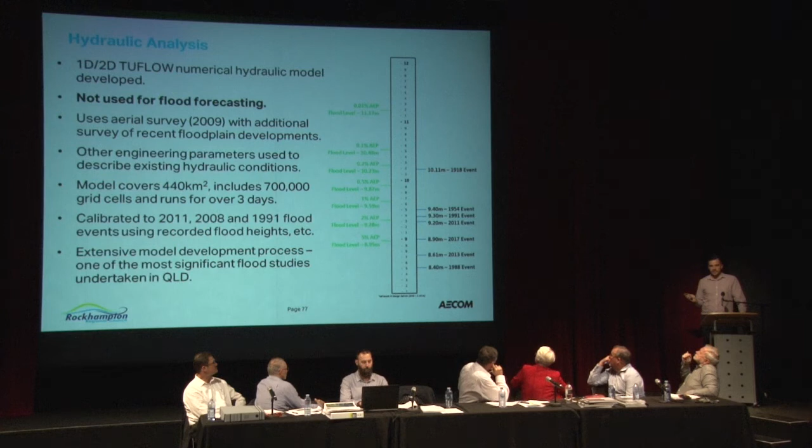The model covers 440 square kilometres of floodplain, 700,000 grid cells to assess flooding, and when we produce these models we calibrate them to actual recorded flood heights and velocities, making sure the model can replicate conditions that occur during those flood events. Out of all the studies we've been involved in, this Fitzroy River is probably the most extensively studied, so there's a number of models that show good correlation between them.

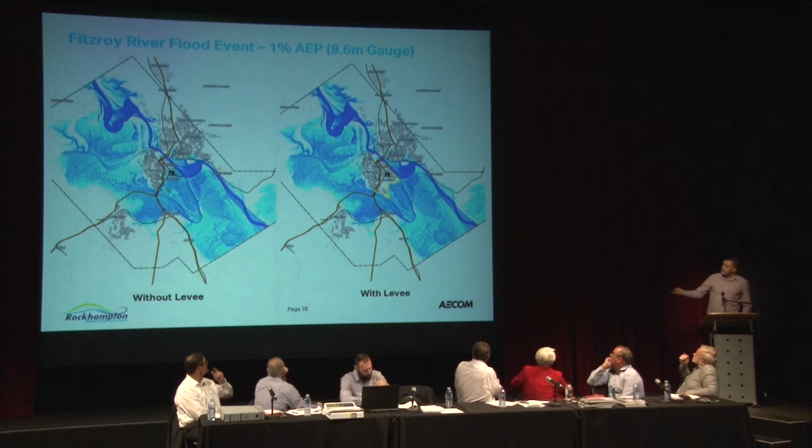There's a couple of animations here, so you're seeing side by side basically. We'll replay it if we have to, or we'll do that during the Q&A. So it's just a side-by-side simulation of a 9.6 gauge height, which is the design height of the levee. Critically, you can see the levee on the right here in yellow. I'll go back and see if I can get it to run again.

Initially, as everyone's aware, you have that backwater come back up Gavial Creek and into the western floodplain. Those coming across the floodplain probably saw dirty water here, clean water on the other side in the last flood. That occurs initially, and then the breakout occurs at the west, up at Pink Lily, and that flow then comes back through the Yeppen crossing. So flows particularly through here, as I said earlier, are critical in terms of the levee, because the levee has to take that flow around the corner there.

I'll just go one more time. The other critical flow path is obviously then down the main river channel. The levee along here, we've positioned it on the top bank, away from the bank as far as we practically can, to get it away from constricting the river. There is some slight constriction though that occurs down, particularly around the treatment plant near Gavial Creek there, and that does result in some increase in heights, particularly for this North Rocky area. That was a key reason why the North Rocky scheme, the other project, was brought forward, to try and offset the impacts that the South Rocky levee would create.

Afflux map, so predicted differences with the levee being put in place. What would occur? What happens to the flooding? So the area in green is obviously protected area, that's no longer wet. Again, you can see the key flow path being through the Yeppen North throat, and also to some lesser extent through the Yeppen South area. That area there where the levee comes out does cause increases in flood heights, which you can see there, and transitions back to the airport.

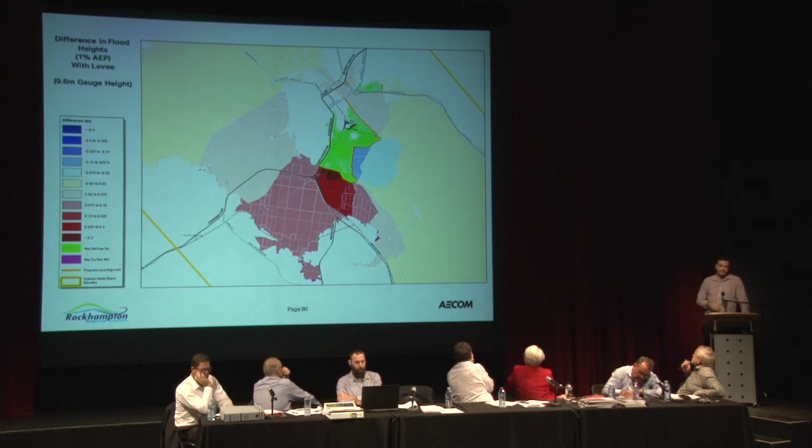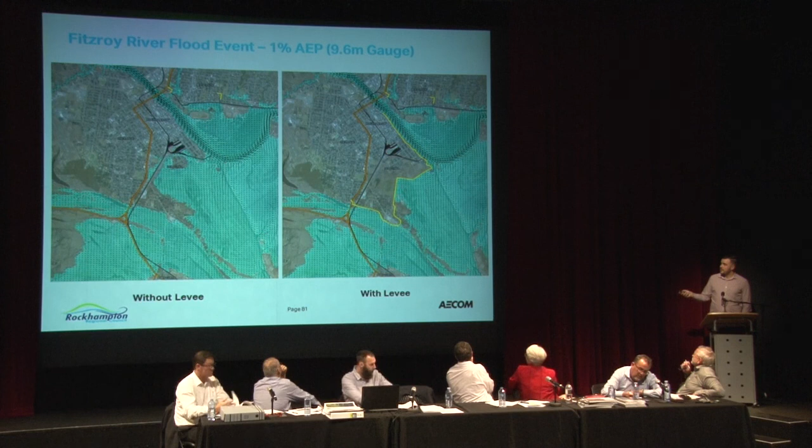More zoomed in with some arrows. You can see again it backs up into this area first, back up through the crossing, and shortly you'll see it turns around and we get the flow around Hastings and down the river. So again, we'll come back to these if they're a bit more zoomed in to show the flood behaviour before and after the levee.

So south. The South Rocky local catchment obviously is in behind the levee - 10.8 square kilometres, fairly reasonable sized catchment. It's mostly urbanised. Shorter critical duration, so 2 to 9 hours roughly storm duration will cause flooding in this particular catchment. It's fairly ageing infrastructure, as you're aware, so older development and lesser stormwater infrastructure, and has had a number of recent floods. The most recent, lesser extent in 2017, particularly 2008. There was a significant flood event in South Rocky local catchment, 2013, the Australia Day event, and also Marcia in 2015 to some extent.

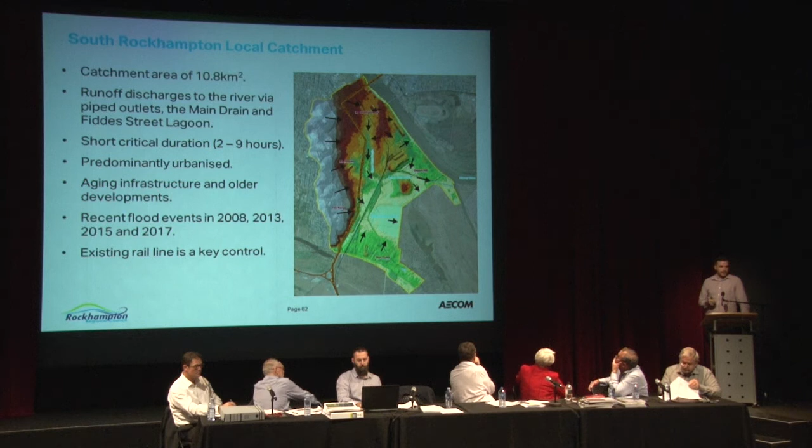So how do we look at this? Again, we develop a model. It's common practice for the engineering industry to develop a numerical model to assess flood behaviour. Again, it's a similar process: determine flows, simulate actual known events, and make sure the model can replicate those conditions. Then we simulate with and without the levee conditions. What that all shows is that, and most people are aware who live in Rockhampton, there's a significant catchment in behind the levee, and that stormwater arriving at the levee.

Most of the time we see sunny day floods in Rocky, and we have for a number of floods, but 2008 is a good example where we had minor river levels up, but we also had a local rain event occur over the South Rocky catchment. That's where a levee would need to capture some of that stormwater and pump it over the levee. Through the assessment, what we've concluded is that we need 3 pump stations, 13 culvert penetrations through the system with backflow prevention devices, and stormwater diversion works to complement the levee operations.

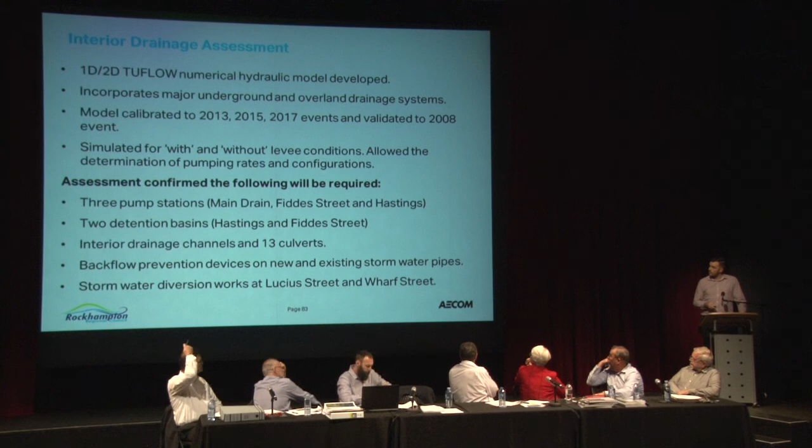This is just an extract from the model showing flood behaviour. There's already existing flood risk that most people are aware of, that the main flow path comes down through the urban areas into the main drain system, and the main drain comes down to the river. There's already existing issues here and also upstream of the rail. The rail is a key control, and it's actually subject of a current study being undertaken to look at flood mitigation for the local catchment through this area.

The levee system, the whole intent is to try and make sure we don't make that any worse and to try and still capture those flows down at particularly Fiddes Street. You can see there's significant storage that occurs down at the Fiddes Street lagoon areas, and that's where our major pump station sits to collect that water and pump it over. Pumping also occurs on the main drain and down at Hastings.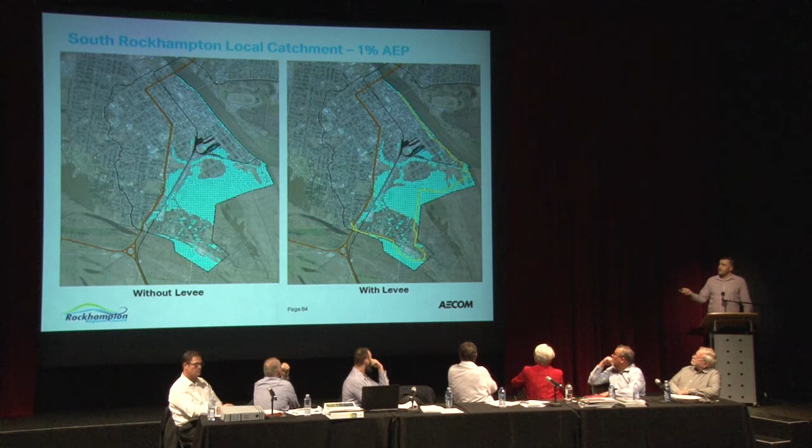So that's the flood depths for the local catchment with the levee in.

This is our assessment of the implications of what the levee does if you do get that concurrent flooding. What we've tried to do is maximise - obviously cost with pumping goes up as you choose greater and greater pumps - so we've tried to do an offset, with pumping here and down here. We've tried to optimise that pumping rate to ensure that any impacts that do occur here, which you can see in the pink and red, is within areas that aren't populated, within open areas and not affecting existing buildings or floor heights.

Keeping in mind, and it needs to be very clear, that's up to the 1% design event. Now there may still be an event that occurs greater than that, and everyone needs to be aware of that. That's a risk with a levee, that you have an interior rainfall event that exceeds the 1%, and there would be some impacts interior to the levee system.

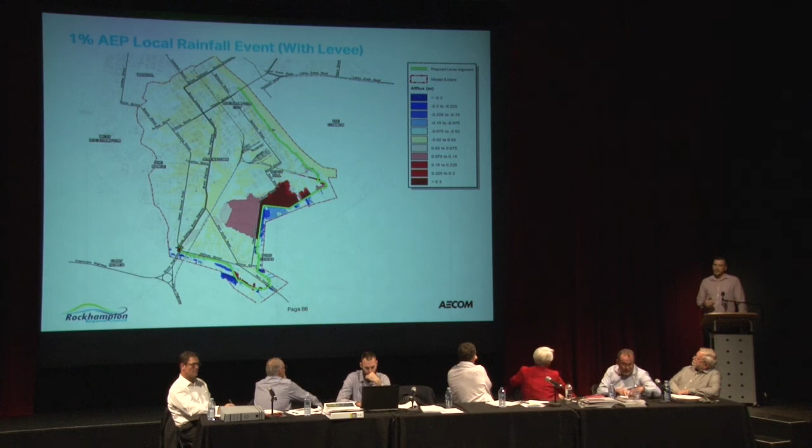I'll scoot through this very quickly. Risk management is inherent in everything we do in terms of engineering, and there's a risk register being developed for this project in accordance with the Levee, International Levee Handbook.

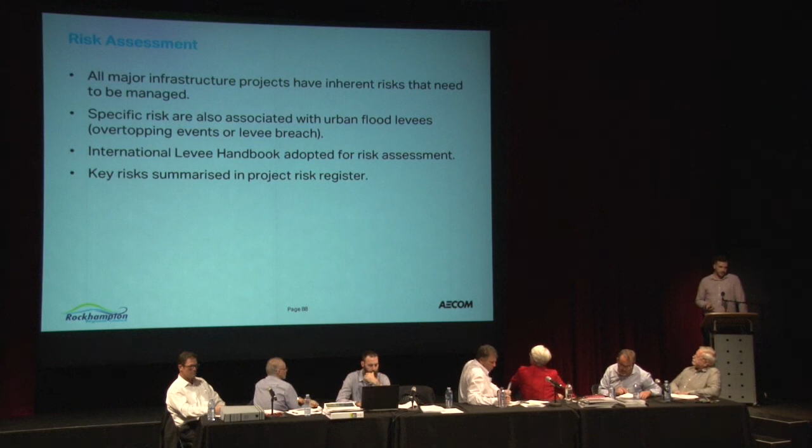Operations and maintenance - we've got an O&M manual, operations and maintenance manual that we've produced, and an emergency response plan for the project. This is a major project, so it will require annual maintenance, routine condition assessments, inspections, and the like throughout its life. Current estimate is $100,000 per annum, made up of maintenance costs and operational costs for the project.

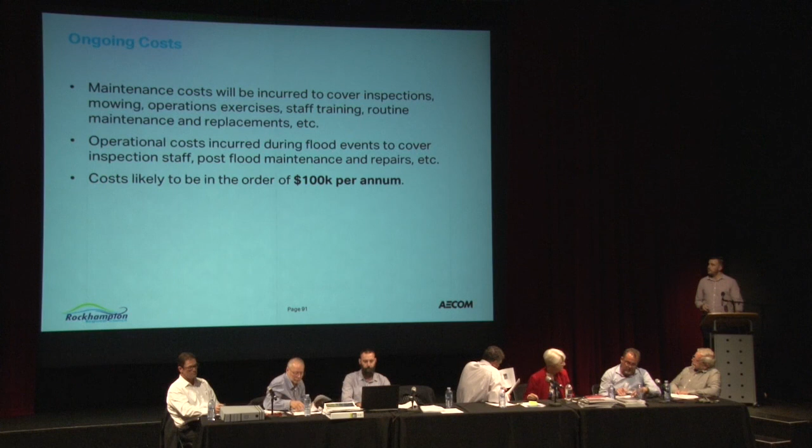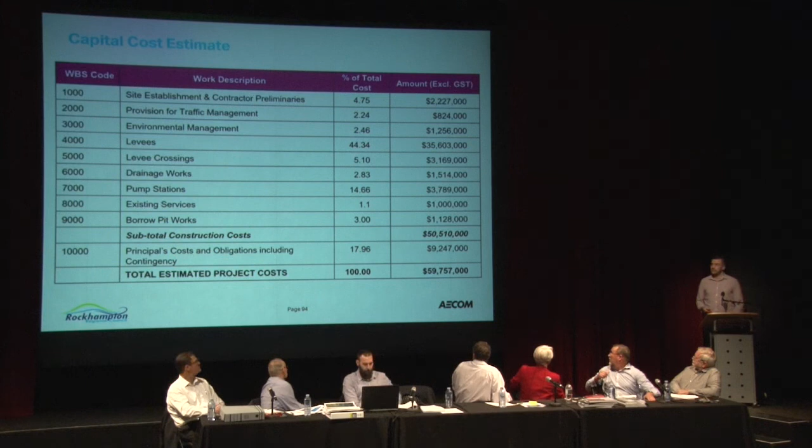The economics is obviously important as well in terms of justifying whether the project should proceed. When we look at the economics for any flood mitigation project, we have direct benefits and indirect benefits. Direct benefits are like reduction in flood damages that occur because the levee's in place - we're offsetting the need to invest in Lower Dawson Road immunity upgrade.

There's about $40 million project there to upgrade Lower Dawson Road eventually. Then there's other indirect benefits, like reduction in insurance premiums that may occur inside the levied area, and also reduced business interruptions and the like with the levee. On the flip side, there's direct costs - the upfront capital expenditure and then the ongoing operations and maintenance costs. We pull all that into an economic model and assess it against a number of sensitivities, in accordance with federal requirements for funding applications.

In this particular case, the average benefit cost ratio for the project was 1.6, and it's never dropped below 1 for all the sensitivities that we assessed, getting up to about 2.5 or so in a best case sensitivity. But in general, around that 1.6, suggesting that the benefits are greater than the costs, basically. First year rate of return is higher than the cash discount rate, which is important from an economics perspective, because that means the project should proceed immediately if you can, under its current appraisal.

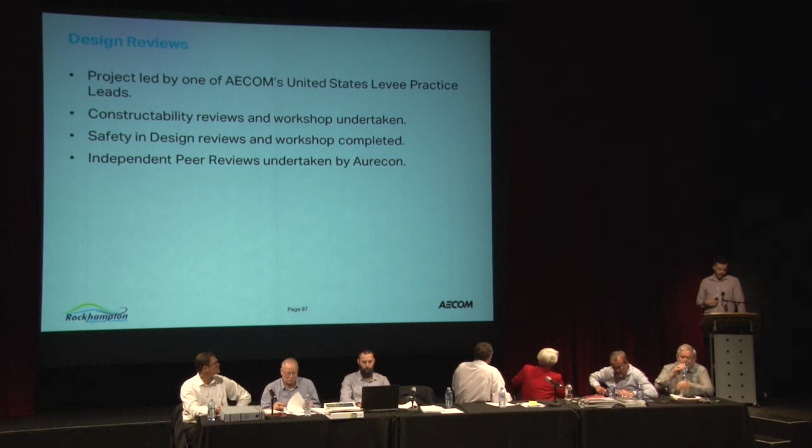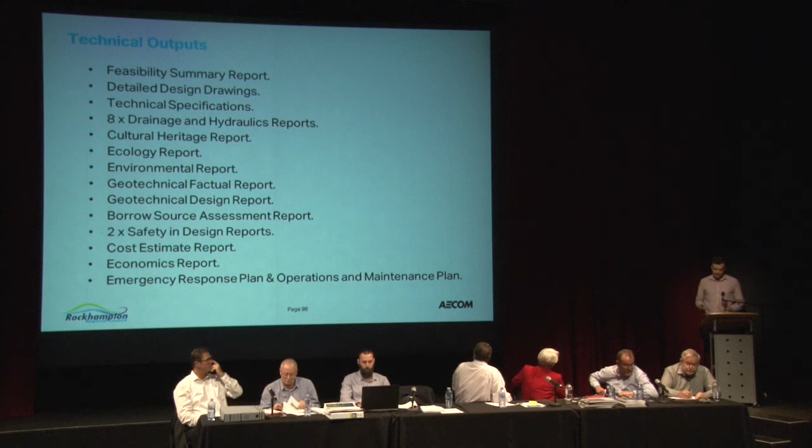The other complementary works are important because we've recommended these to Council as well. At Pink Lily Meander there's still ongoing erosion, getting closer to the road every flood. So stabilisation of the meander is important and needs to occur, whether that's through Council, TMR or whoever. That's also priority 3 in the study.

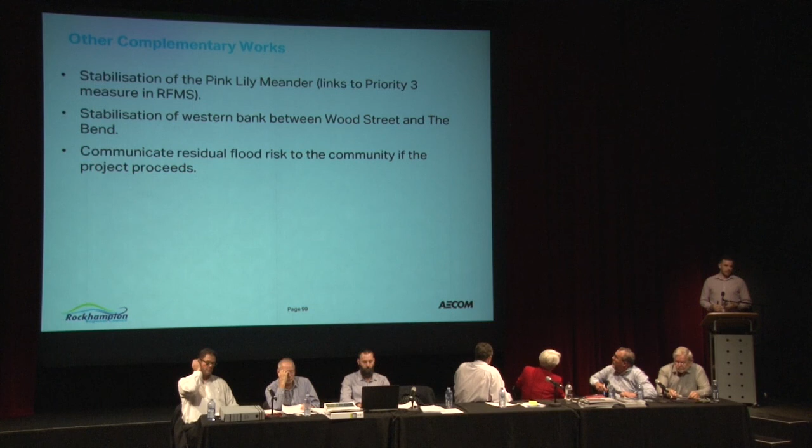Stabilisation of the riverbank between Wood Street and the Bend is needed. Currently there's an unprotected section of bank there where the levee will be adjacent, and it's recommended that Council do that work prior to or just after the levee project. Probably the key thing is, if the project proceeds, Council needs to be very clear about residual flood risk. We don't want to see people developing and intensifying development behind levees - it's not a good outcome. So development controls and making sure the community understands their flood risk after the levee is paramount.

Our technical findings after the project was complete: it's technically viable and would significantly reduce flood risk for the interior area. The project will impact some private lands and require resumptions or easements - that's important to note. It will have some impacts to flood behaviour, which we've documented in our reports.

Economic evaluation shows the project is positive in terms of BCR. Importantly, any levee or major infrastructure requires careful construction and then operation and maintenance to ensure it actually performs its intended function. That's an important recommendation.

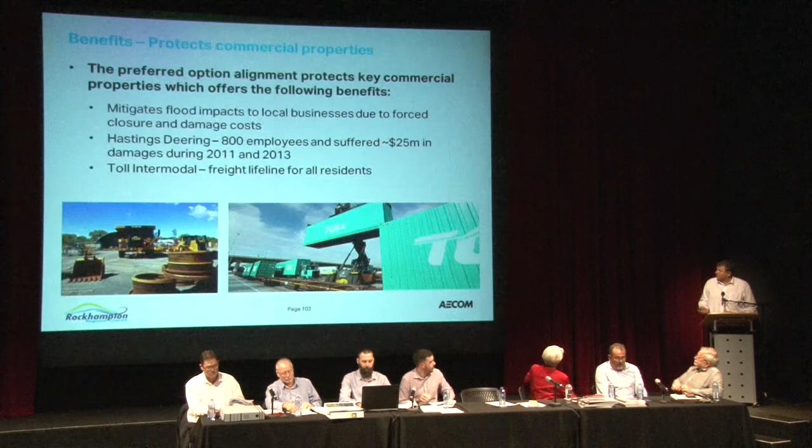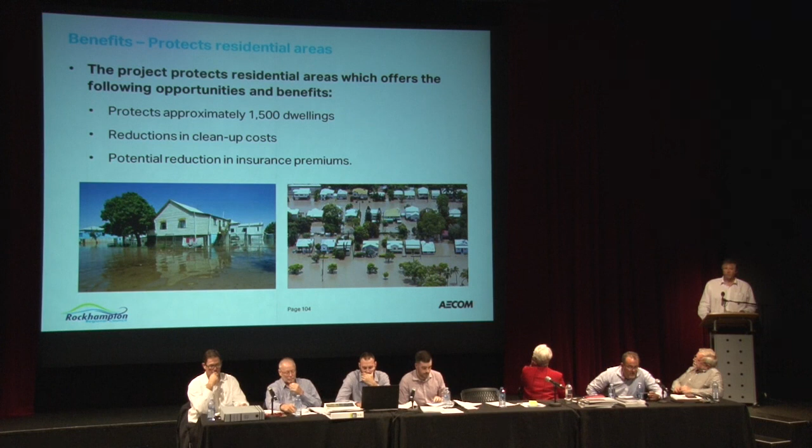Some of this has already been covered by Ben, so I'll go through these quite quickly, but there are clearly residential benefits. There's 1,500 dwellings identified as within the flood zone. There's the regular clean-up costs and damage costs that should be included, and there's a potential for reduction in insurance premiums.

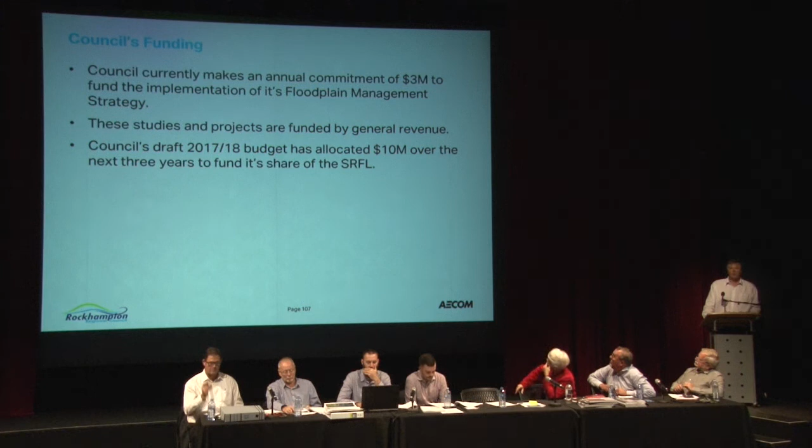Right now, Council's current commitment - I mentioned earlier we have a floodplain management strategy that's adopted. Council spends on average around $3 million a year to undertake studies and design flood mitigation works. The studies and works are funded from our general revenue. Where we are right now, Council's draft 2017-18 budget has allocated $10 million over 3 years to fund its share of the South Rockhampton flood levee.

The next steps, mentioned briefly by Ben - the project has been fully designed in an engineering sense. There are some other steps to go forward. Planning approval is required, which involves Council lodging an application and getting environmental approval and planning approval to proceed. That's another step where this project will be exhibited for public comment. There's also property acquisitions and an early works package.

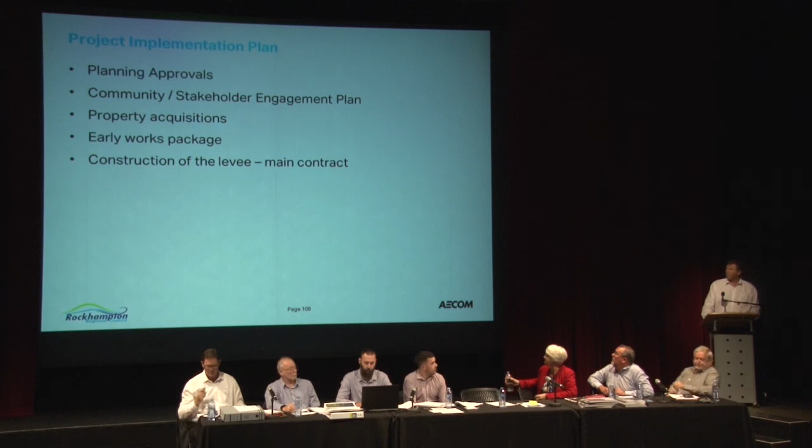There was lots of talk about utilities, stormwater, and the need for backflow. So there's an opportunity to start works on that early works package, which is effectively works we control ourselves. And then the final step is the construction of the levee, which would be done as a major contract through a tender process. Thank you very much.